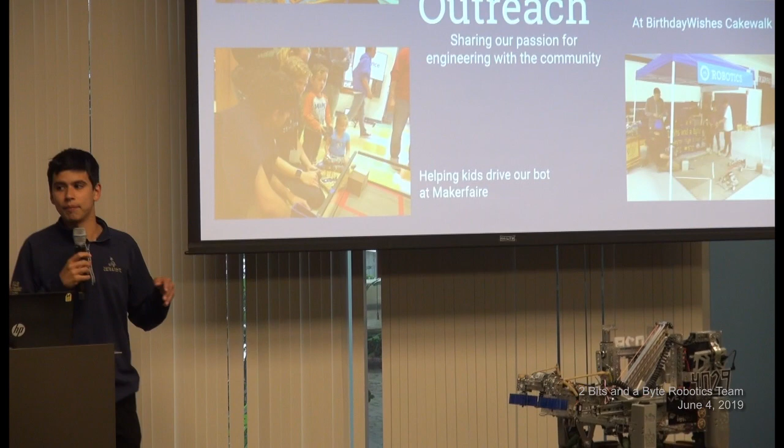Okay, so as part of the First Tech Challenge, which is the program we compete in, we're strongly encouraged to do a lot of outreach. There's a lot of advancement opportunities in the competitions, and it's just a great way to spread STEM. So a few of the things we do is we try to go to a lot of local events and let kids and parents talk with us about STEM careers, and also let them drive the robots around. So recently we went to the Boston Mini Maker Faire, the local Lexington Discovery Day, and the Birthday Wishes Cakewalk, which is a charity for underprivileged kids.

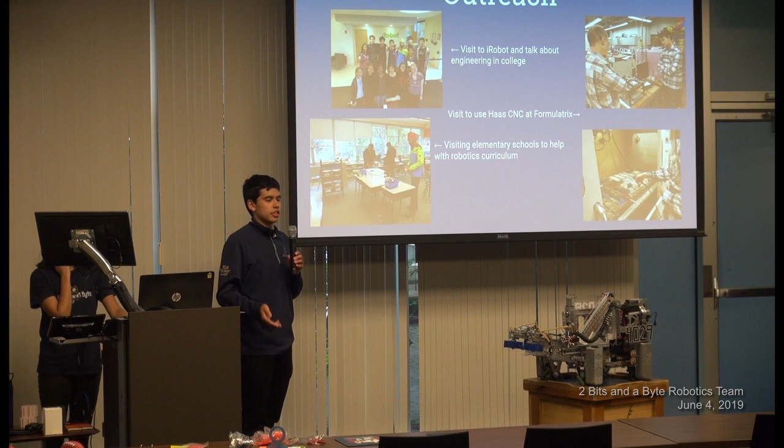We also try to talk with a lot of professionals in the field. So recently we toured Ava Robotics, which is a telepresence company, Mass Robotics, and iRobot. And we got a lot of chances to talk about the careers in STEM that some of us might be interested in, especially in engineering.

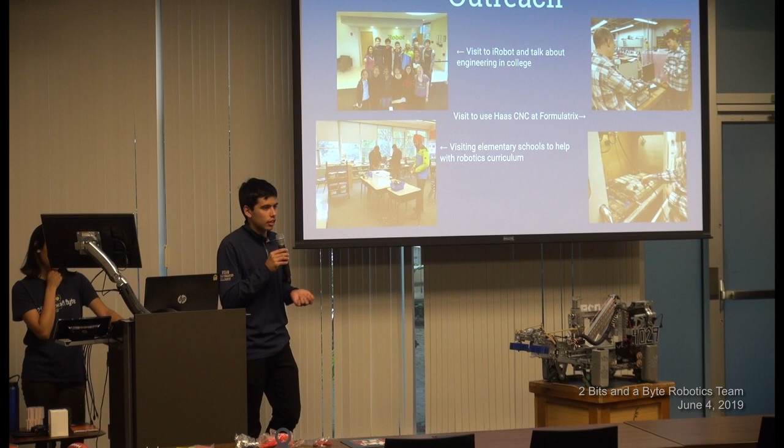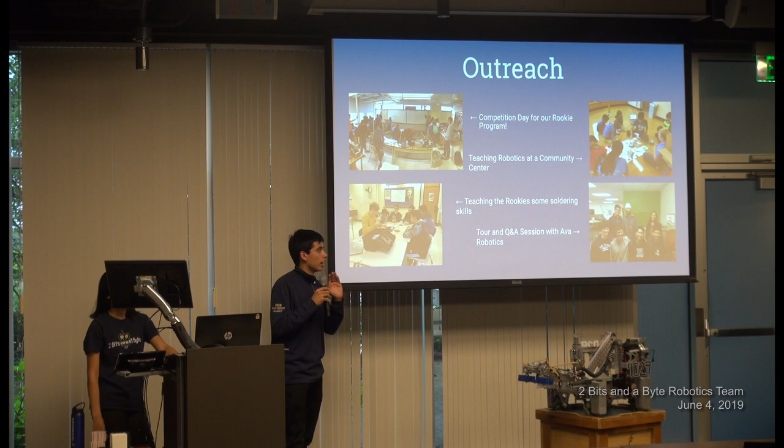And another thing that we do as a big part of our outreach is just trying to teach kids robotics. So the biggest thing we do is we have a rookie program, which takes underclassmen from our high school and teaches them the basics of robotics. And we have classes with them, and then we have a competition at the end of the year. And this is a great way to teach kids about engineering, because there is only one engineering class at our high school, and it's only for seniors. And we also started teaching at a local recreation center, Hayden, to teach elementary schoolers and middle schoolers robotics.

So we have some constraints that are put on the robot. They play a really big role in how we design a robot and the different designs that we choose to use. It must fit within an 18-inch cube. It has to be under 42 pounds. All the power has to come from a single 12-volt battery, and then we can only have 8 motors and 12 servos on the robot.

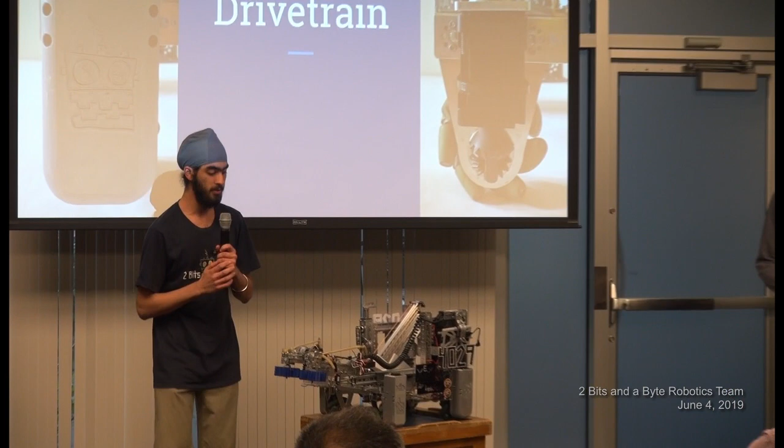What's a servo versus a motor? So the difference between servos and motors: motors are these bigger actuators that you can see here. We don't have precise control over the actual angle that the motor is at, but we can control its speed and we can measure its rotations. With servos, they have a limited range of motion. They're also weaker and slower, but we can get really precise at which angle they're turning at.

Okay, so this is our drivetrain. It consists of the 4 wheels and the motors that drive them. This is the part of the robot that most teams will actually try and build before the competition is announced, because it doesn't change a lot. One thing about this competition is that it had the elevated crater walls in each corner of the field. So those were hard to navigate over because they were a big obstacle in our way. So that's why we couldn't actually build our drivetrain ahead of time, because we had to elevate it a couple inches off the ground to clear those walls, and we couldn't anticipate that.

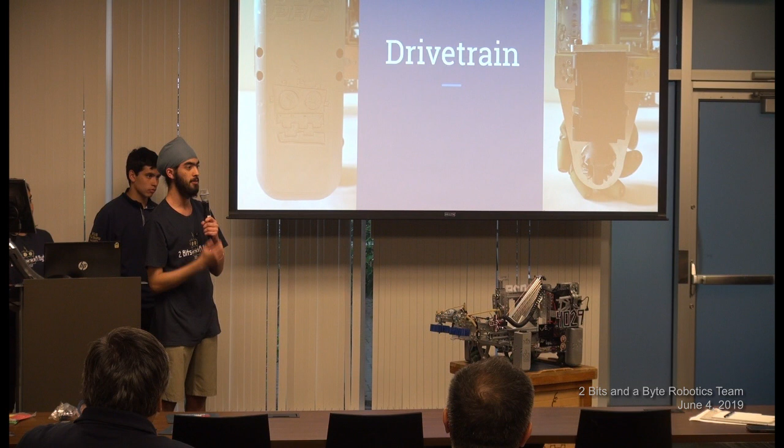Okay, so for our drivetrain, we use a holonomic drive. This is a unique system of movement, which basically means that every available degree of freedom is able to be independently controlled. So what that means for driving in 2 dimensions, we have 3 available degrees of freedom. One is our x-coordinate, one is our y-coordinate, and one is the rotation that we're at.

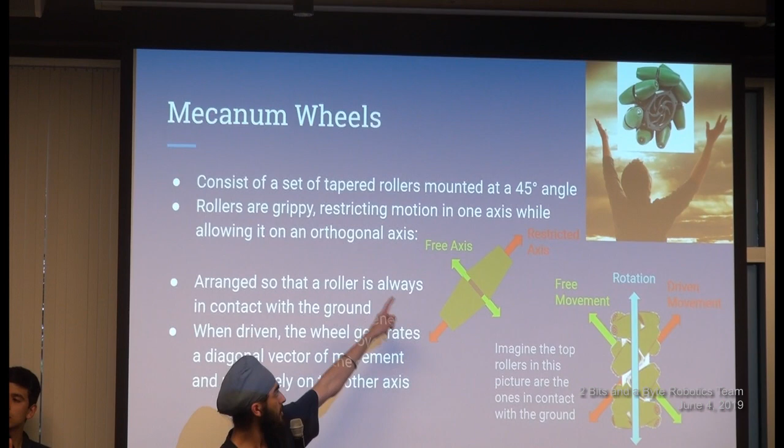The system that we used actually consists of these specialized wheels called Mecanum wheels. So the unique thing about these wheels is that they consist of a set of tapered rollers like this. They're all mounted at a 45-degree angle. The important thing about these rollers is that they're pretty grippy. So in one axis, they can roll freely, which is the free axis, and then at a right angle to that is the restricted axis, which prevents movement.

Once you combine all of those rollers and you put them on a wheel, that means that when you turn the wheel forwards, the wheel moves in a diagonal vector of movement like this, and then at a right angle to that is free movement.

So the main advantage of a holonomic drive is agility. We have a very limited amount of space to work with on the field, considering that there are 4 other robots and then all of the structures actually on the field. So that means we basically have to be able to turn on point and then move in any direction that we want to, like on demand.

An important thing to note is that driving with a regular car, even though you can be at any location and you can rotate, the car actually has a non-holonomic drivetrain, because when you want to make a turn, you often end up moving to a different location while you're executing that turn, which obviously wouldn't work for our robot considering the space constraints. Do you lose points in the competition if you bang into another robot?

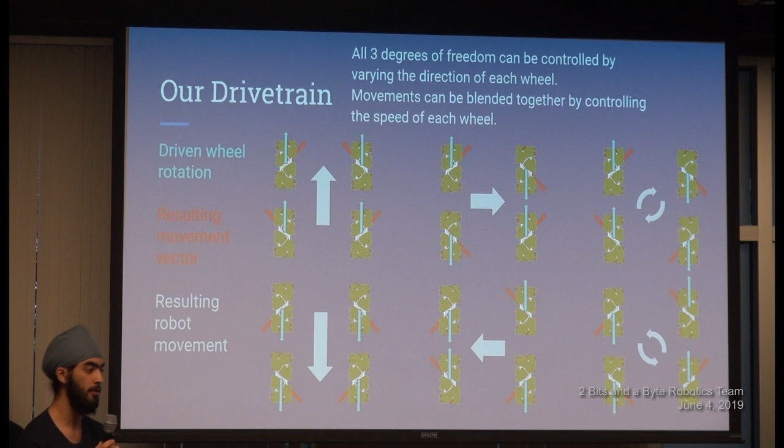You actually don't, but there are specific rules about how defensive you can be and how much you can interfere with other robots. Okay, so when you combine the diagonal vectors of all 4 Mecanum wheels, you can achieve basically the 6 basic motions in 2D space.

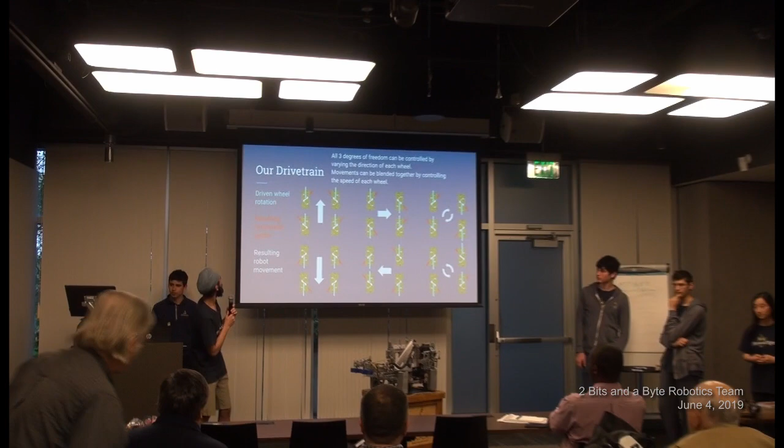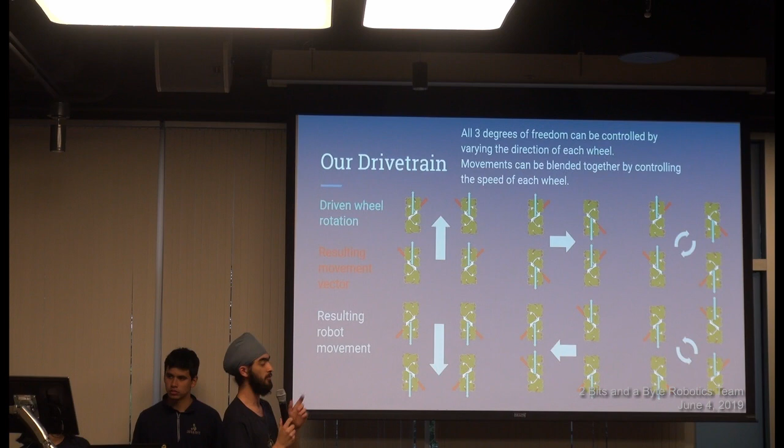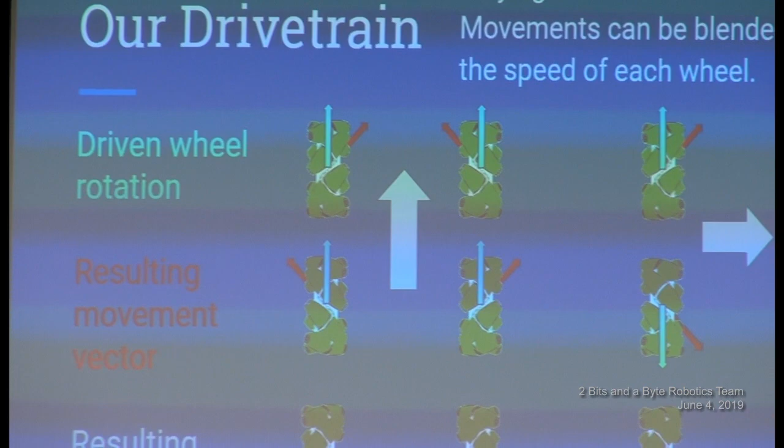So first off, the most simple one is when all the wheels are going forwards. Even though the diagonal vectors of movement for each wheel are pointing in different directions, the end result is that the whole robot moves forwards. Then by flipping the directions of 2 of the wheels, we can achieve the more complex motions. So for example, if the wheels on 2 of the corners move in reverse, we actually translate left and right. And then in the last configuration, we can rotate in place.

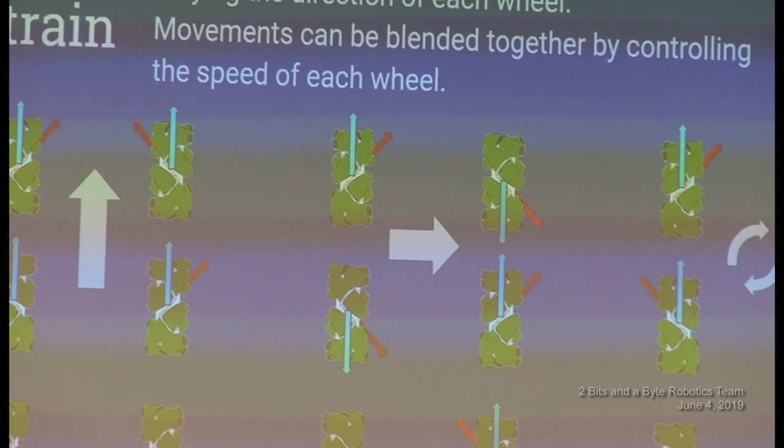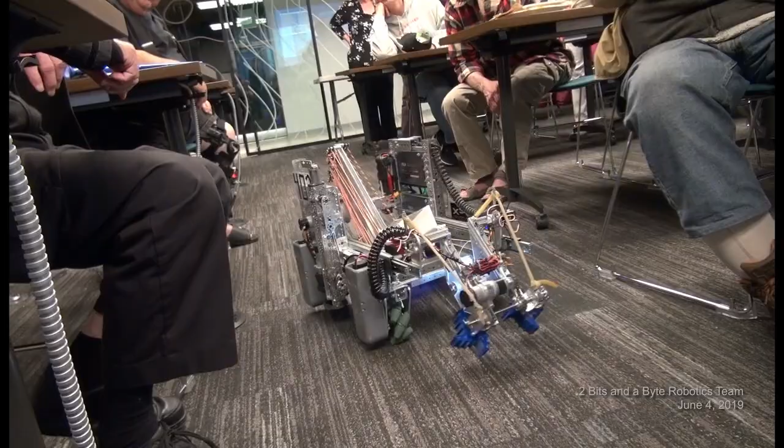We also learn a lot about other skills that we should know in life. The first one is communication. We have a 15-member team. This isn't even all of us, and we all work on different parts of the robot. And so it's really important that we all know how to communicate our ideas and goals and deadlines throughout the season. The next thing is goal setting.

We have a 7-month season, and we try to set long-range goals and then break them up into smaller tasks that we can keep track of. The last thing is collaboration. We, again, have 15 members. And so we kick off every year with a sticky note meeting where everybody brainstorms different solutions to the challenge that we've been given. We decide on the path forward through different meetings with everyone where we weigh the pros and cons of all the ideas that we have.

So there were about 8 seniors during this season, including myself, and we'll all be going to college this fall to study a STEM-related field, whether that be biology, chemistry, mechanical engineering, electrical engineering, computer science. We'll all be studying what we really want to study in college, which is very respectable, in my opinion.

So I chose to do mechanical engineering at NYU starting this fall, and possibly a minor in computer science and electrical engineering, which I'm very, very excited for. So other than NYU, other schools that this year's seniors are going to attend are UIUC, Purdue, UMass, RPI, and Northeastern. 2 Bits and a Byte.